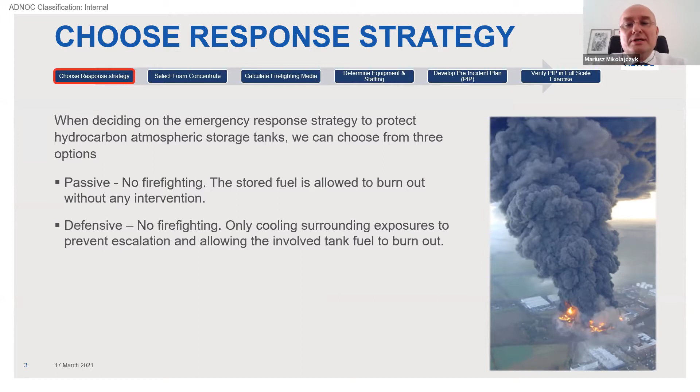In both mentioned strategies, the burnout process will result in a fire that is likely to last several days, complete loss of the stored product, environmental and reputation problems, and in some cases, potential for boil over. Therefore, the passive and defensive strategies are often not acceptable options for large atmospheric storage tank fires. The third option is called offensive. It is an attempt to extinguish the fire using fixed, semi-fixed, mobile, or a combination of these fire protection systems. The mobile application is always provided over the top of the tank using large capacity monitors, if we talk about the large tanks.

Extinguishment of tank fires can only be obtained by using firefighting foam. However, historically, the chances of successful fire control and extinguishment are relatively low, especially for larger diameter tanks. The largest hydrocarbon tank fire successfully extinguished had a diameter of 82.4 meters. Also, we should keep in mind that the most effective foams today containing fluorosurfactants are under debate due to environmental concerns. Most probably, they will be excluded from use in the foreseeable future.

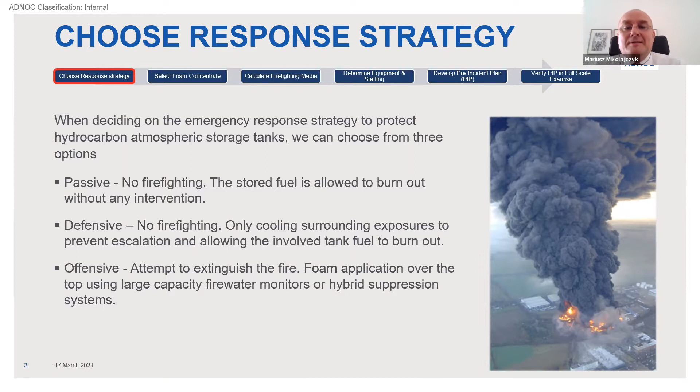So what determines the strategy? Definitely the destructive consequences of the scenario. Associated risk like the boil-over phenomenon. Environmental impact, including the consequences of firefighting activities. Potential reputation impact, business continuity aspect, realistic assessment of actual existing firefighting capabilities, and associated costs like CapEx and OpEx.

Assuming that the third option has been selected, we are going to fight the fire, then we have to choose a foam concentrate grade. There is a wide range of foam concentrate grades. A few examples: aqueous film-forming foam, film-forming fluoroprotein, and a version suitable for polar liquids, fluoroprotein, or fluorine-free foam, our rising star. The ADNOC preferred foam concentrate grade is AR-FFF 1-3% due to its unique and high performance parameters that maximize probability of successful intervention. And here, I would like to emphasize that we aim to properly collect and properly dispose of all foam solution runoff in case of an intervention.

One of the main factors in achieving an efficient extinguishment is the use of high quality foam. So what parameters should we consider? Viscosity, that determines the liquid movement conditions. Mixing ratio determines the amount of foam concentrate needed for firefighting. pH value for corrosivity reflection, suitability with fresh and seawater, and there might be a significant difference in the foam performance when using sea and fresh water.

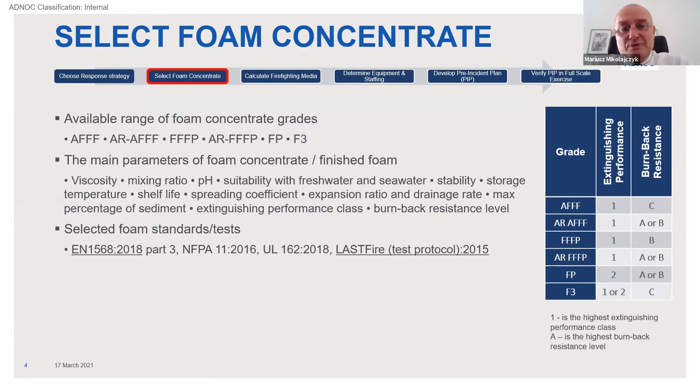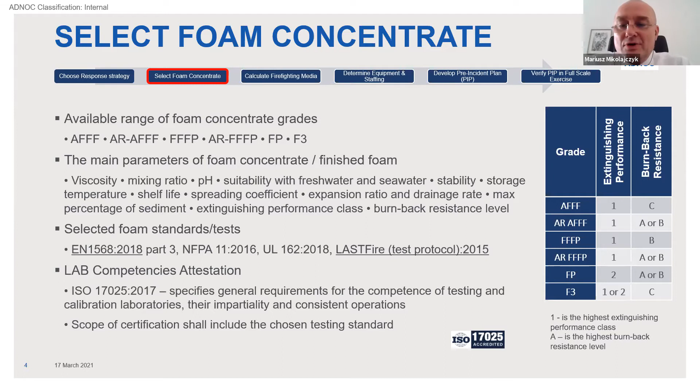The last step in this stage is to determine lab competency attestation requirements to ensure that the provided foam test results are fully reliable. ADNOC's choice is ISO 17025. The standard specifies requirements for testing and calibration laboratories, their competence, impartiality, and consistent operations. In addition, it is necessary to ensure that the lab scope of certification includes the chosen foam standard that we wish to use for testing of our foam. We need to test the foam at least annually to confirm its original parameters.

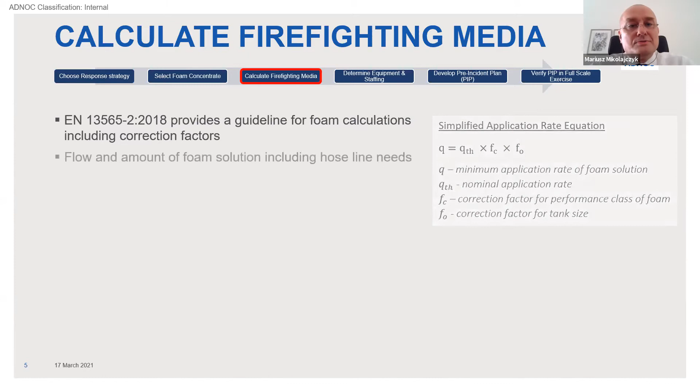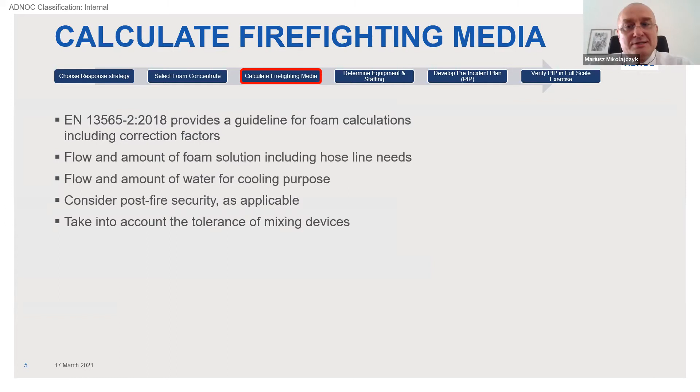To determine the foam solution needs, we use EN 13565 Part 2. This standard provides factors that link the foam application needs with the tank size and the foam performance. The application rate equation we can see on the right side. It is a simple multiplication of the nominal application rate and the factor values. Here, basically, we have to determine the required flows of foam solution for firefighting and water cooling. For cooling needs, radiant heat models are often used to determine fire water demands that shall be utilized for exposure protection of adjacent tanks and structures.

Also, we should keep in mind that the fire models are empirical, based on data from small-scale laboratory experiments, and the remaining uncertainty in the models is how to scale this data when increasing the length scale by orders of magnitude, from tank diameter 10 to 100 meters or bigger. More work is needed to improve the accuracy of the data for large tanks and for various types of foam in terms of application rate and the distance that foam can effectively travel across a burning liquid surface. Today's manufacturers are saying between 30 and 50 meters.

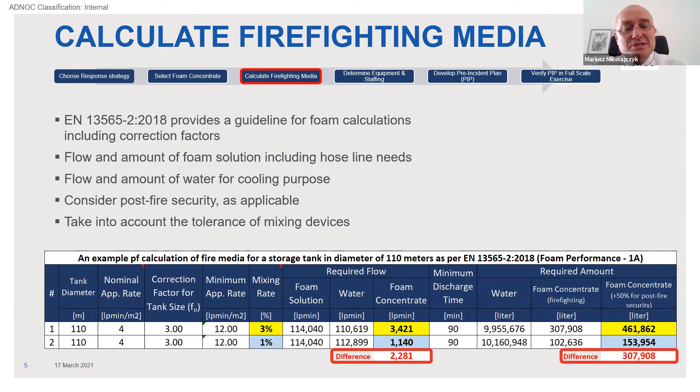That's the traveling distance. To avoid reignition of the extinguished tank, post-fire foam application shall be guaranteed to maintain a sufficient foam blanket on the fuel surface until the remaining product is removed. In this table, for the sake of this calculation, 50% more foam was considered than is required for extinguishing the fire.

Right, having both water and foam solution flow demands, we can determine the equipment needs. So foam proportioning system, foam and water monitors, foam concentrate carriers, firewater supply equipment, infrastructure. We have to identify a sufficient water source, pumps, hoses. It is necessary to ensure that firewater system capabilities are sufficient for uninterrupted water supply during the entire emergency. We should remember that practical experience from fires exemplifies the importance of using large-scale equipment, and I know that there might be some controversy here, and the need for an increased application rate when fighting large diameter tank fires.

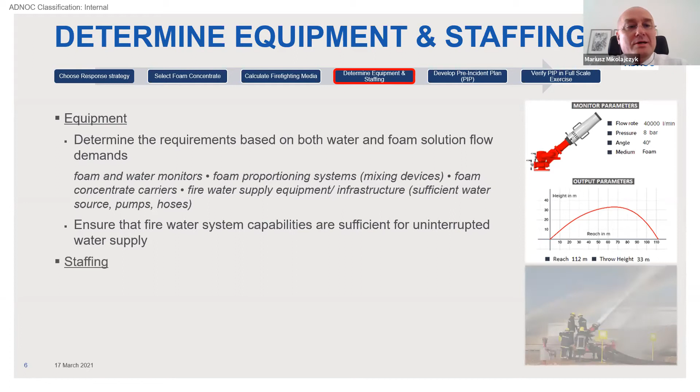Knowing what equipment we need to use for a given scenario, we can determine staffing by breaking down the emergency response strategy into manageable, feasible, tactical tasks to be carried out by the operating units. Basically, we must find answers for a question: what number of staff is required to provide timely deployment of the required equipment and safely operate it during the entire emergency response process. It's also important to determine the staff competency requirements.

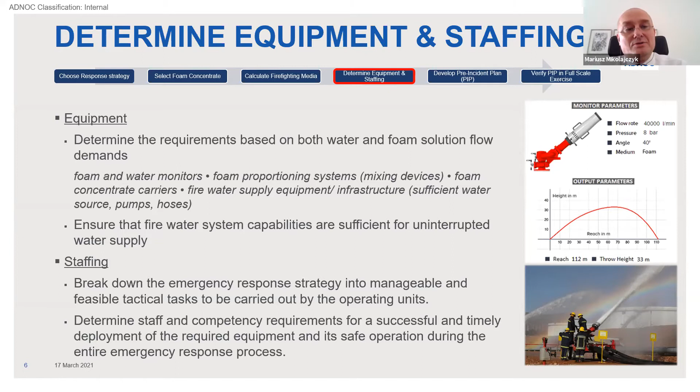Practice shows that full surface tank fires might require in excess of 100 responders, as was mentioned in the previous session. Not all of them need to be career firefighters, but it requires selecting tasks that can be carried out by auxiliary responders. Full surface fires on large diameter tanks pose extraordinary logistic and coordination challenges. And as I have mentioned earlier, there is limited evidence about fires that have been successfully extinguished. This is why we shall prepare a detailed pre-incident plan to increase the probability of successful intervention.

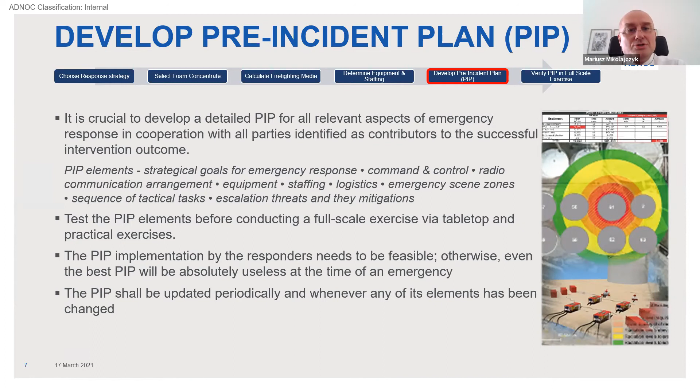So, till now, we have chosen the strategy, defined the fire, foam concentrate grades, calculations are done, we have determined the staff and equipment needed, and we have our pre-incident plan on paper. So it is time for the last point in this journey, the PIP practical verification. We need to assess all elements of the PIP that until now work only on paper, such as dispatching process, command and control, radio communication arrangement, logistic solutions, correctness of equipment positioning, staffing adequacy, safety plan for emergency response, medical support, and provision of rehabilitation for the responders, because it will not be a quick intervention.

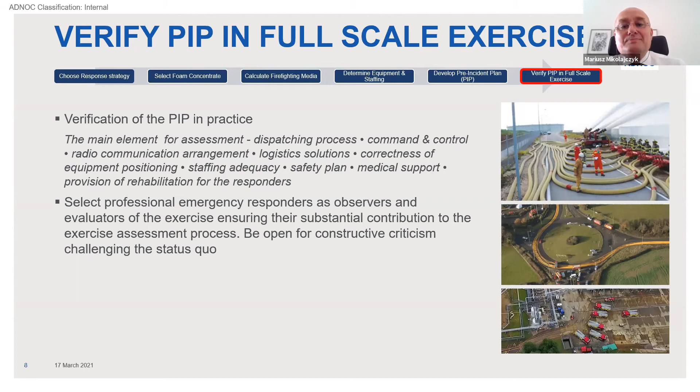This we can assume. It is crucial to carefully select observers and evaluators, ensuring their substantial contribution to the exercise assessment process. We have to be open to constructive criticism, challenging the PIP status quo. So, who's supposed to be involved in the full-scale scenarios? A controller to manage and direct the overall exercise. Players, meaning responders, as in a real emergency, and the planned operation personnel. Simulators who will drive the injection messages to the players. Then observers to document the exercise, and evaluators who will assess performance. I would not recommend mixing those roles in case of full-scale exercises.

Also, it is important for process transparency to select an appropriate evaluation method to determine whether the exercise objectives were achieved. As output of the exercise, a clear PIP improvement plan shall be produced and then consequently implemented.